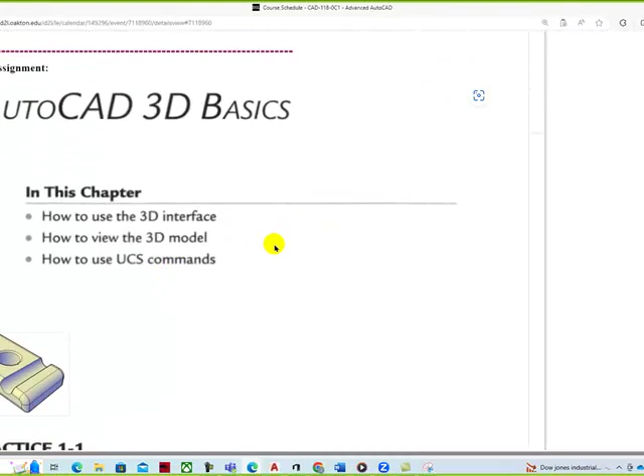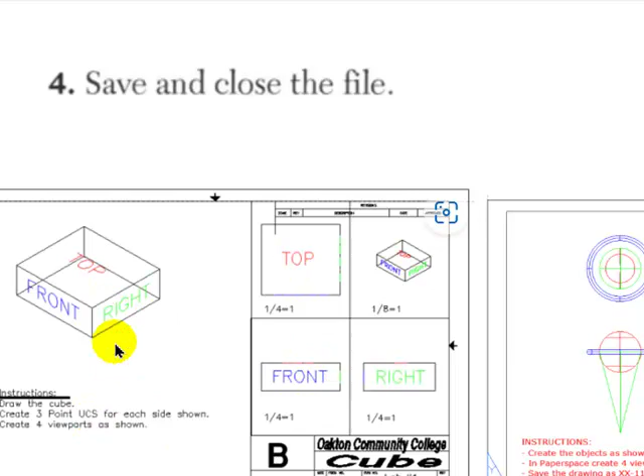We're going through 3D basics, and we're working with our AutoCAD on these different assignments. This was our Module 1 where we created a cube, and then we created these viewports. There was a video glitch, so I did update the video to add the audio for adding the viewports. You can go ahead and add those viewports, scale them, and put them on the drawing.

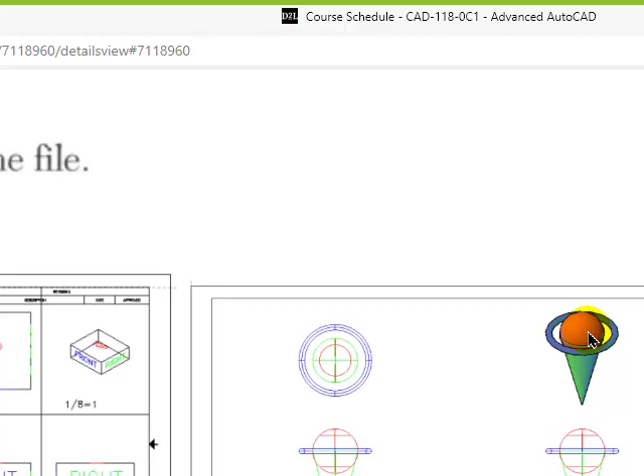And then this one here is just using primitives - solid cylinders, solid sphere, torus, and cone. Then we assemble them, or at least use 3D snaps.

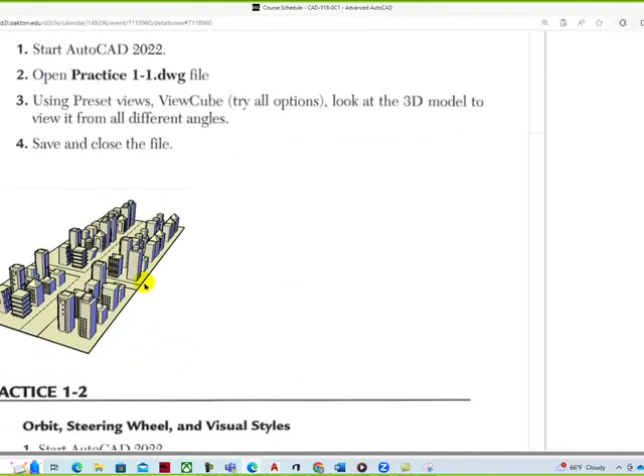As we go through and work with these drawings, we're just following the textbook. What's nice about the textbook is he gives you examples and practice exercises that you can download and use. As we look at the drawing exercises, you download the practice files and then you modify them. We've created the labs for you for those with these video lectures, so you can watch the video lecture on how to create these different parts.

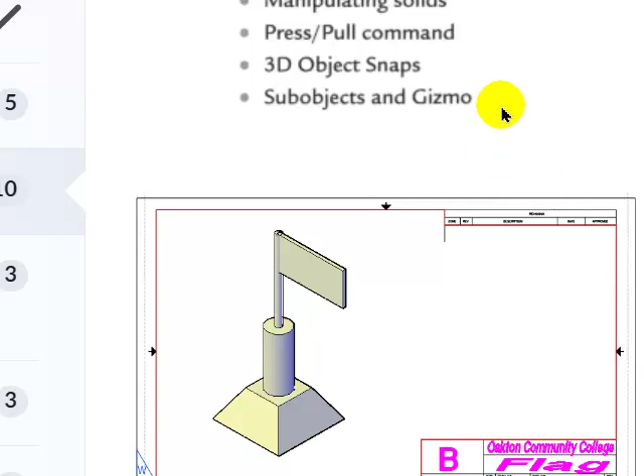And so this is a great exercise. We make this little flag on this pedestal, but the idea is that you're able to navigate in 3D and work with these different planes in 3D. This is just Boolean functions where you can add and subtract and be able to union things.

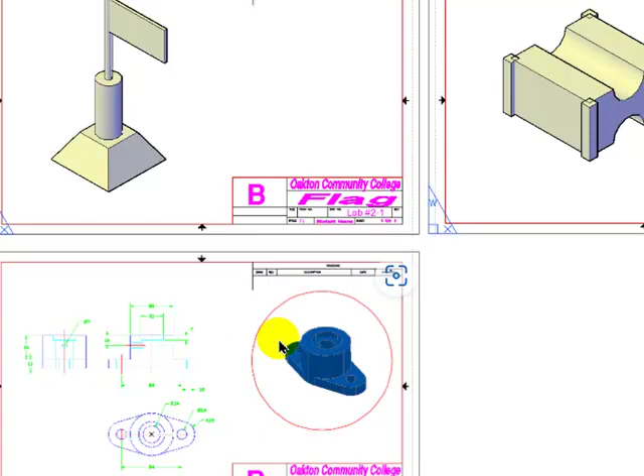And then we have a typical mechanical part, front, top, and left side view with a model. So the instructions are given here, along with the practice exercises and the geometry for that. And then we have a bonus drawing exercise, which would be this architectural project. Here's the videos, so you can play them for how to create those different drawings.

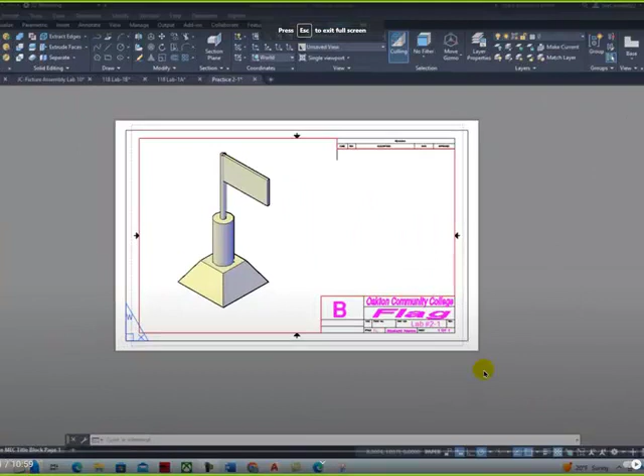So as we walk you through it, go through our different geometry, create the flag. I really enjoy working in 3D - it takes a little practice, but once you start getting the hang of it, I think you'll enjoy it quite a bit. You go through and save the file. Let's pause this video, go back to our main splash page, Module 2.

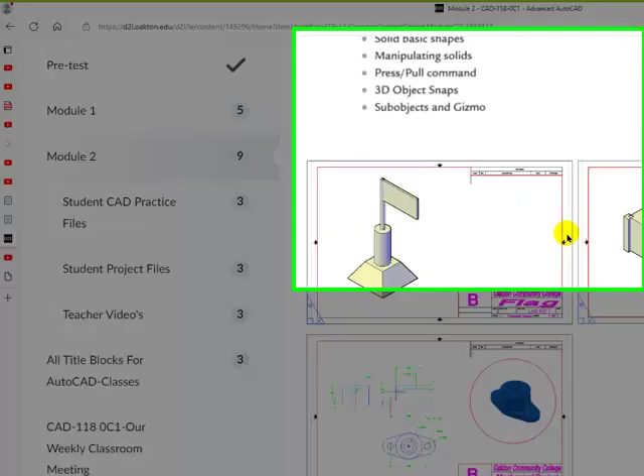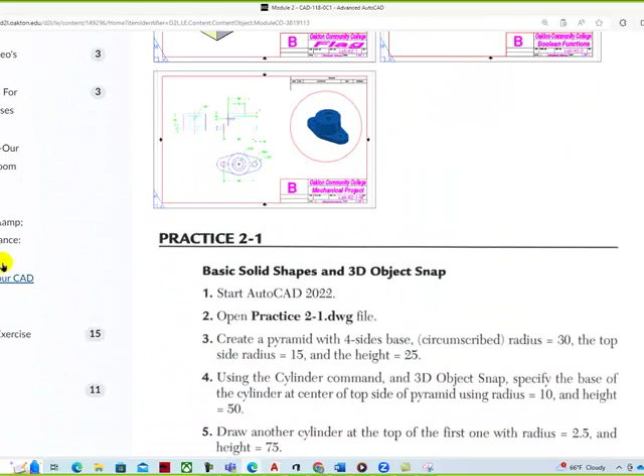Alright, so the videos are there showing you the construction techniques. They're videos - you're welcome to email us and use D2L to go through how to create those geometries and things. And then when we're looking at our textbook, I'll come back to that, but we do have the chapter in the textbook that goes through that.

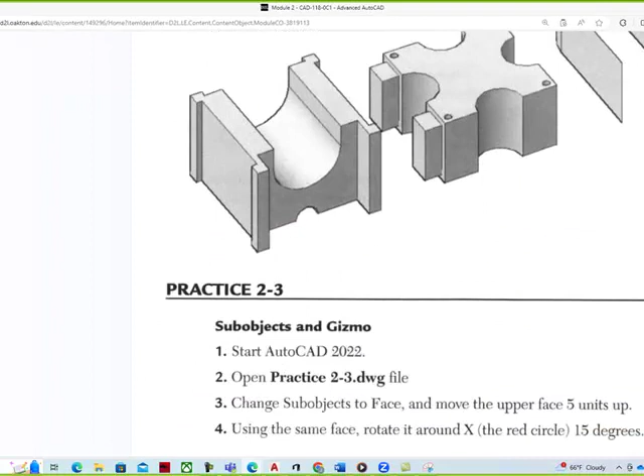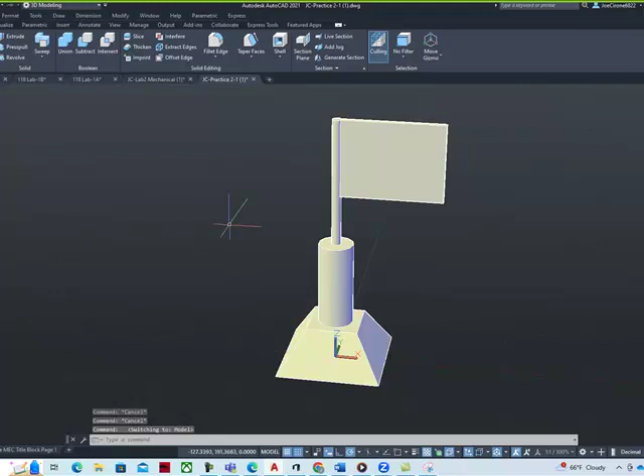If we look at the drawings themselves, here we are in AutoCAD. Let me pull that into the screen. And so here's the drawings that we created last week, and then here are the new ones. And so here's our flag drawing, and if I open that and go to model space, sometimes the graphics cards can be a little glitchy, but essentially, when we work on these different shapes and we create them, we're creating different shapes using the 3D workspace for 3D modeling, and then we're creating the different shapes for things like creating

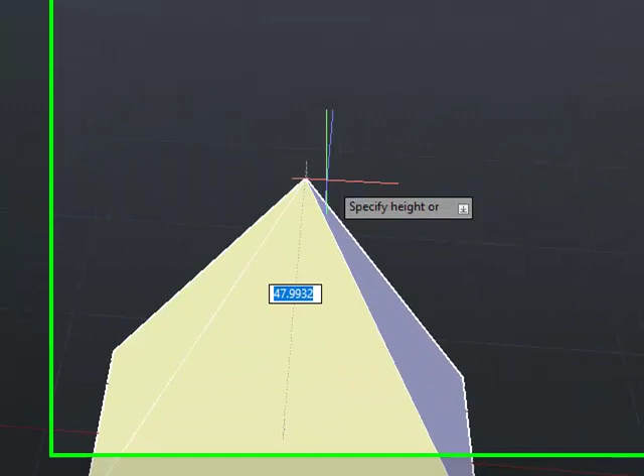a pyramid. And so as we go and create that pyramid, you can create that shape like this, and then as you pull that, you have different options, and I'm using dynamic input so that I can go through, and so you can change the top radius, and so this one's kind of flat on the top, and so we can say top radius and say maybe like that, and then the height, I'm just eyeballing it right now, and you can create those different shapes. And then with dynamic input being on, it gravitates to those different areas.

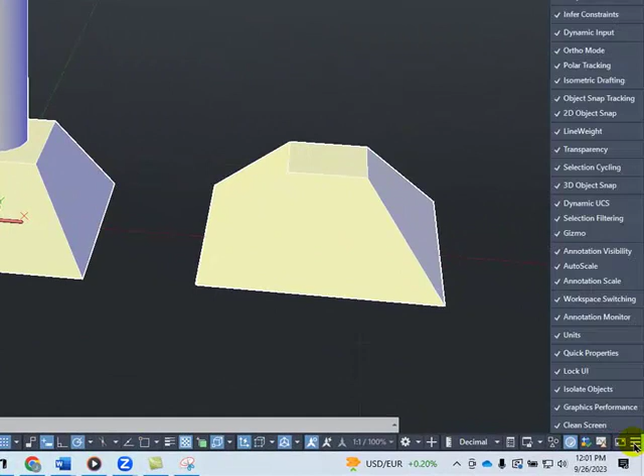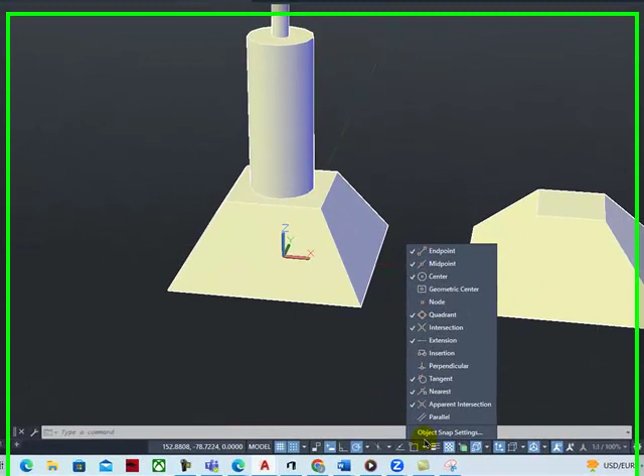And so dynamic input, and I'm actually talking about dynamic UCS, dynamic meaning automatic, and so dynamic automatic or dynamic input is this one right here. And if you use dynamic input with object snap, and so when we look at our OSNAPs, we want to have our OSNAP, 3D OSNAP, come on, there we go, on or enabled.

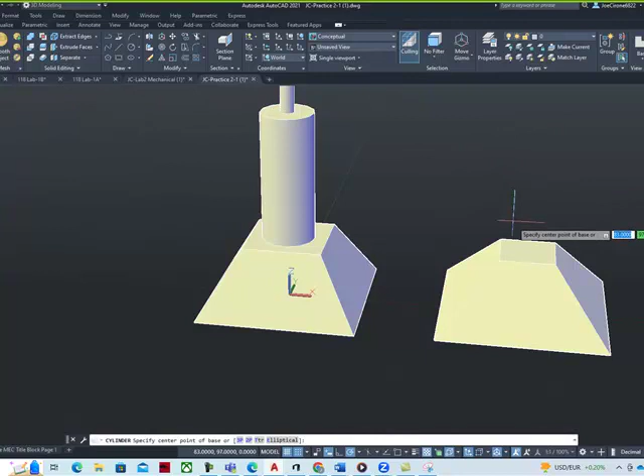And so when 3D OSNAP is on, it'll grab these faces, and so we can go in and we can create a cylinder on the top of it, and we just gravitate to it, and it grabs it dynamically, and then you can create the cylinder, and I'm just going to create it like that, and then I can create another one on top of that, dynamic input.

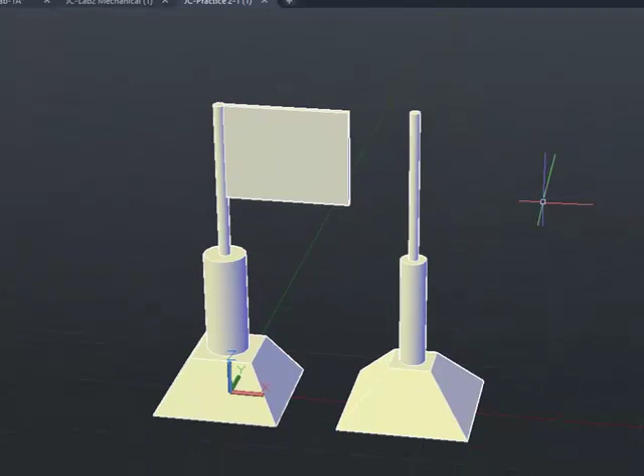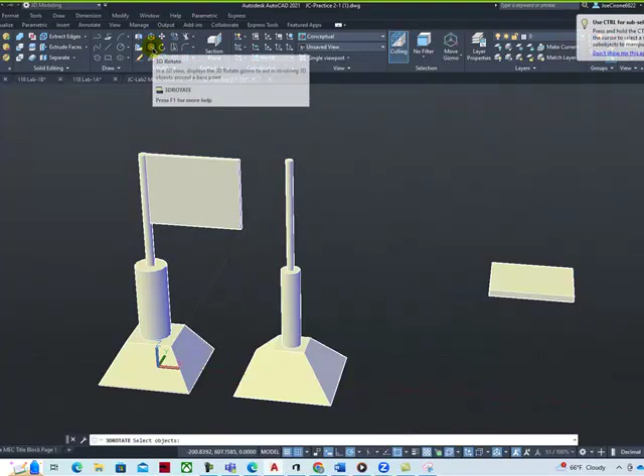And then for the flag, it's hard to draw it in that perspective, and so oftentimes what I'll do is I'll draw the flag on the XY plane, which is on the bottom of the part. And so I'll just draw the shape for the flag, and I'm just eyeballing it like that. And then what I do is I use OSNAP to be able to rotate and manipulate it with 3D rotate. And so here's my 3D rotate command, and I can place the axis right here, grab the hoop, turn on my polar, and drive that north.

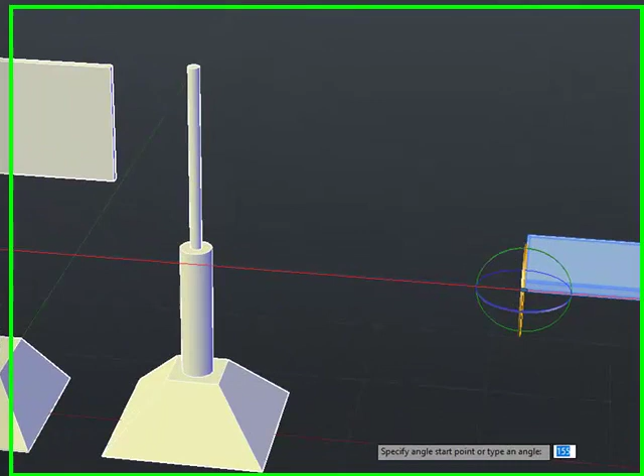Sometimes if I don't get it to track the right way, I'll turn on my ortho. That's F5, right, Al? F8, please. F8, thanks. And that way it'll snap in 90-degree increments. And so ortho is definitely helpful because you want those things to move in 90-degree increments so they're not crooked. And then we just move it as you get better with 3D.

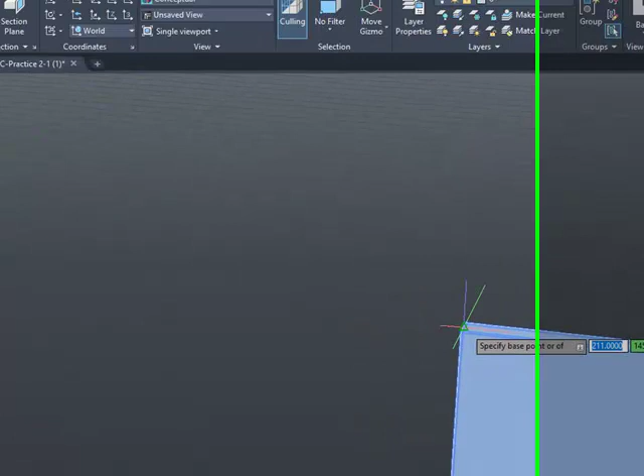And I would probably take this from the midpoint of this line right here. Shift, right-click, midpoint, right there. And then I would bring it over to this quadrant and hit the F8 key to turn off that. And then I would go to shift right mouse click, quadrant right here. And you can see you can actually push it in so that it's part of the pole.

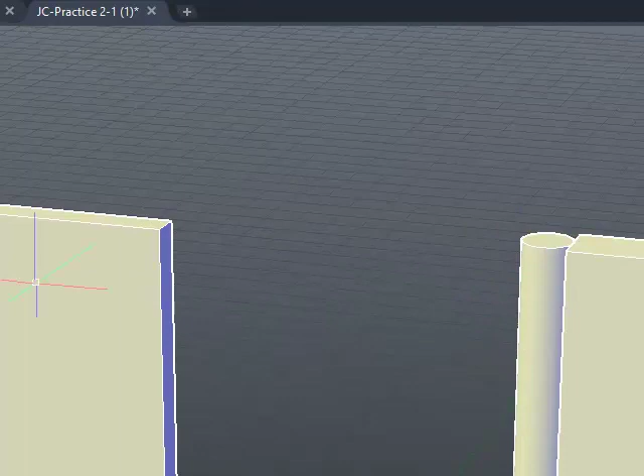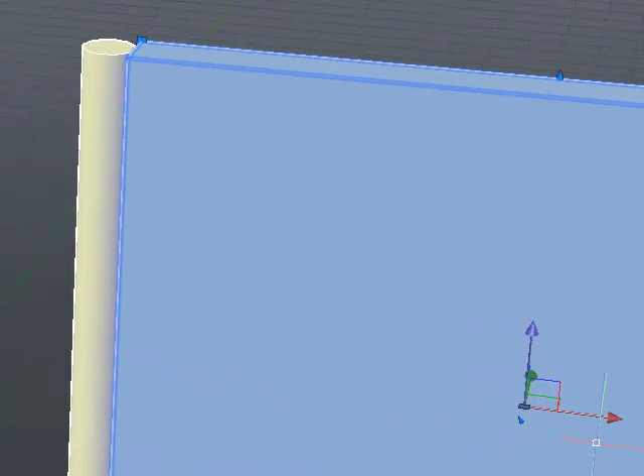And so what I would do is I would use a 3D move command. I grab it, hit enter, and then you grab one of the planes and you can just push it just by eye. And it's OSNAPping with my OSNAP, so I got to turn it off because I'm just using a 3D move and it's fighting with each other. F3, Joe. F3, thanks.

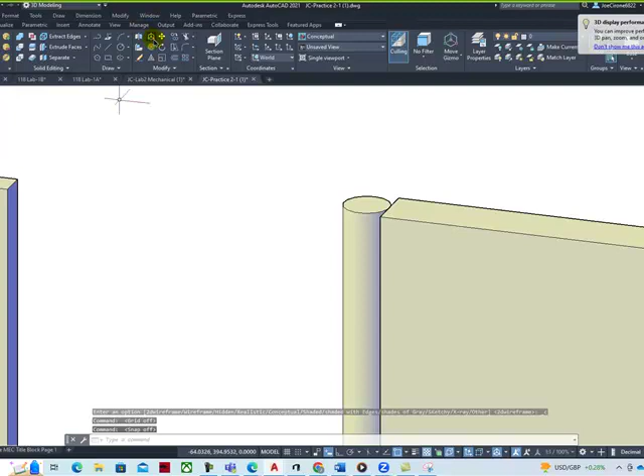Yeah, it's still goofing around on me. So oftentimes when it does that, let me just go through and go to a wireframe. That's worse. Turn off the grid. All right, turn off the grid and snap. Let's try it one more time with 3D move. 3D move, grab the object where we're moving it from, and let's just move it to the center.

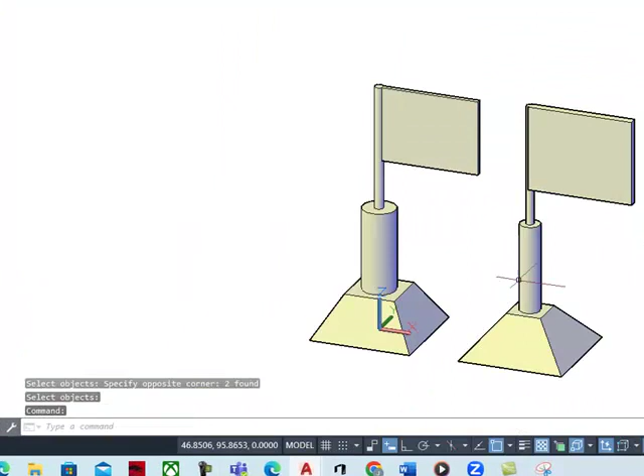There we go. And then if you wanted to, you can Boolean those objects. Solids, union, and then what it'll do is it'll take out and smooth everything out. Shift middle mouse wheel. And there's a lot of really great things. You could put images on here. You could put like a little flag here with a raster image of like Cubs win or something like that. So that's a little exercise in how to work with 3D and some of our 3D components that we've been working on.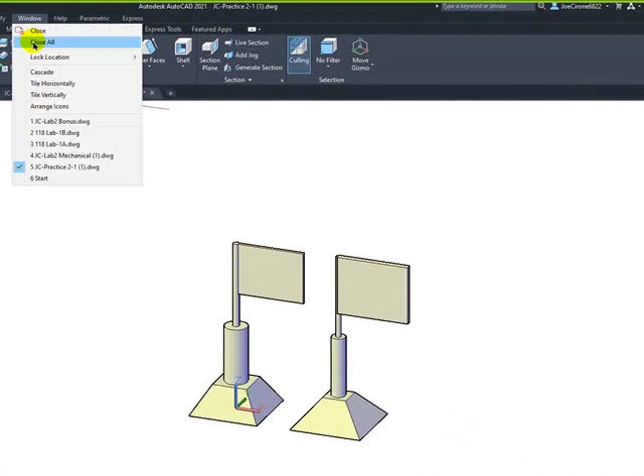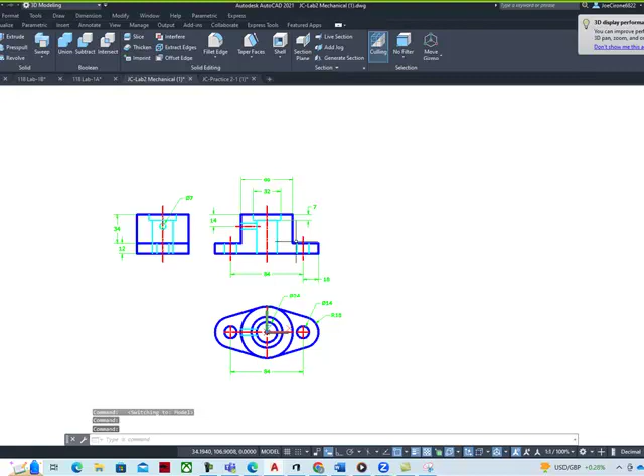And then if I go back to my main splash page, let's see if my graphics card will update. Here's our Lab 1A, Lab 1B, and then here's our mechanical print. And the mechanical print will take you a little bit of time. You have to draw the views properly to create the model for that. And so I put the three-dimensional model out here in space, and then I'll show how to model that in the video,

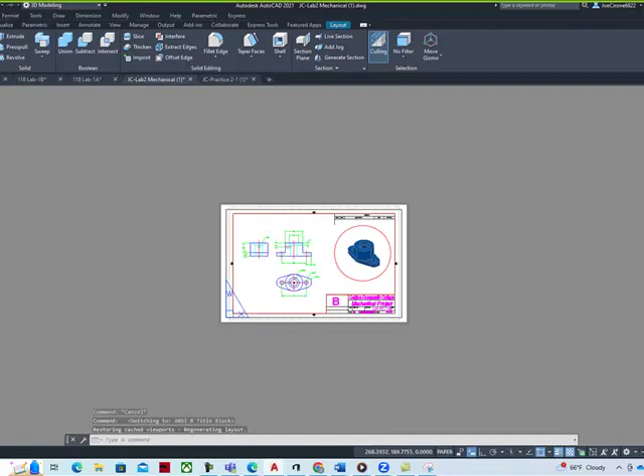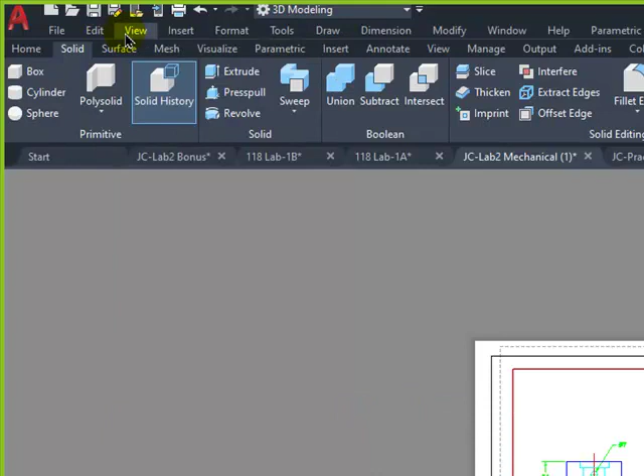and then we'll create a viewport and we'll put that on our B-size mechanical title block because we want them on the title blocks. Control R will get me into my other views. If I regen, sometimes the model disappears. It's a graphics card issue. If I go to a visual style 2D wireframe, you can see it. Visual style. There it is. Conceptual. And it's a basic mechanical project. Alrighty.

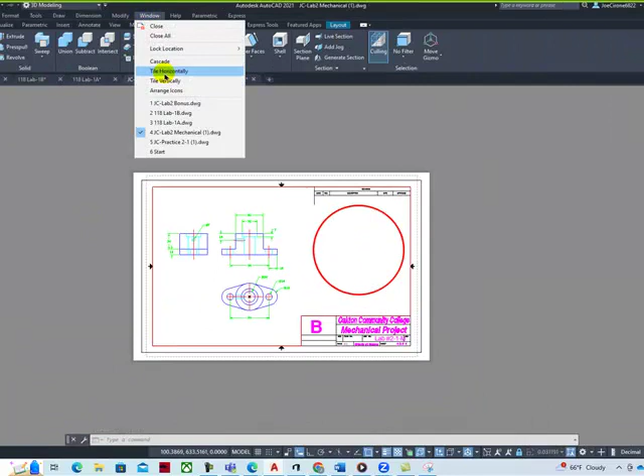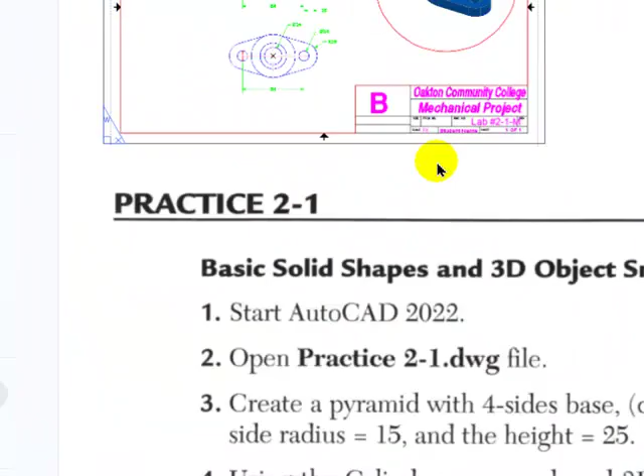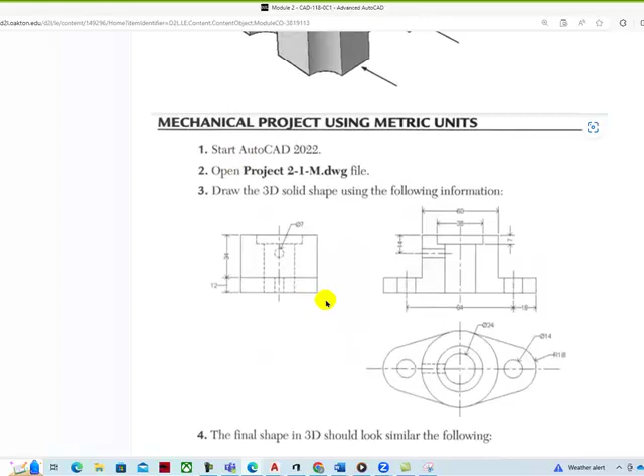So as we continue working on the drawings, be sure to turn in your Module 1 exercises, and then we'll start on Module 2. Module 2 exercises are located in the D2L system for creating solids. Read through Chapter 2 from the textbook. Here's the instructions on how to create the geometry using these different primitives. And then create the mechanical design project, and the architectural is bonus. Practice files are right here. You can download those. Those are taken from the textbook author. You're to take those and manipulate those.

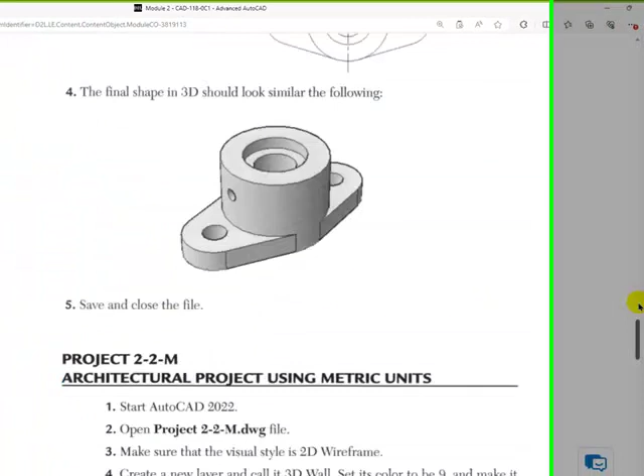And so if we download that and open it, it's just a blank drawing where everything is set so that you can create. And that's the way it's intended by the author as you walk through it step by step. And then here's the tutorials for creating those models. Alrighty, back to the main splash page.

Remember, you're welcome to come in person. We're there in person for office hours and assistance. If you click on this, Al has got this all laid out. So Monday in person, we're in Skokie, P130, P132. Saturday, and we're around on Sundays. We're there quite a bit. In person is basically going to be Monday, Saturday, Sunday, and Wednesday. We'll add Wednesday. And virtually, most of the students are attending virtually. We've got our Tuesday today, and then Thursday, if you want an individual meeting, you need to email us and we'll put together an individual meeting for you.

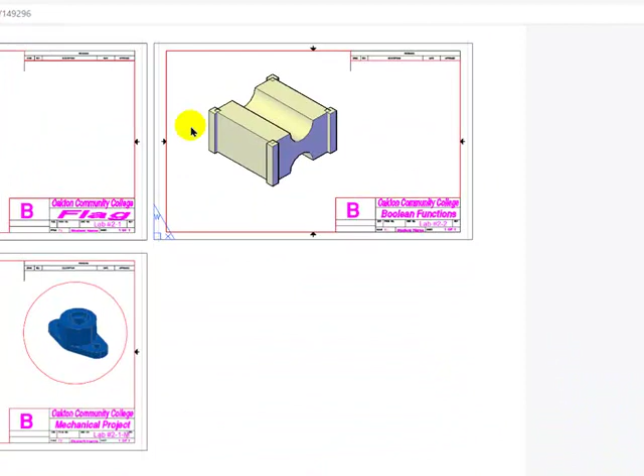Back to the main splash page. So that's the assignment for Module 2. Module 2 is to create these drawings shown right here, upload them to the D2L, and we'll grade those and give you feedback. Under quizzes and exams, be sure to take the quiz for Chapter 1 and then Chapter 2. You can have 2 attempts, and that'll also count towards your score. And those are the questions from the end of the chapter.